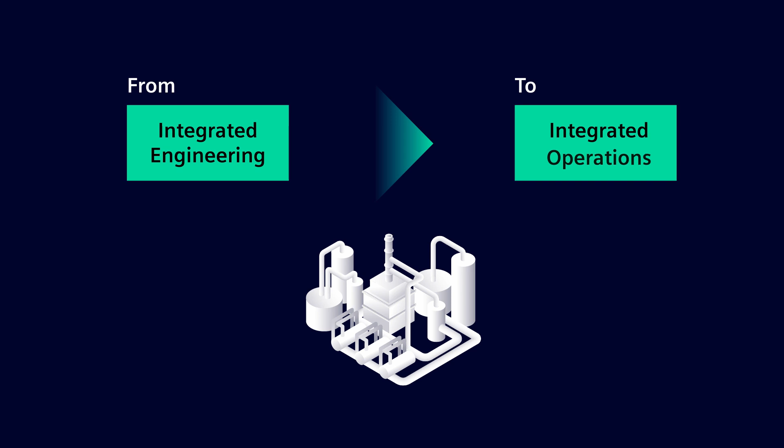Digital transformation is in full swing, and the process industry is no exception. Let's take a look at what opportunities digitizing throughout the life cycle of a plant can offer. From integrated engineering to integrated operations. On the left, you'll see the status of a real plant, and on the right of the screen, the virtual world, i.e. the digital twin.

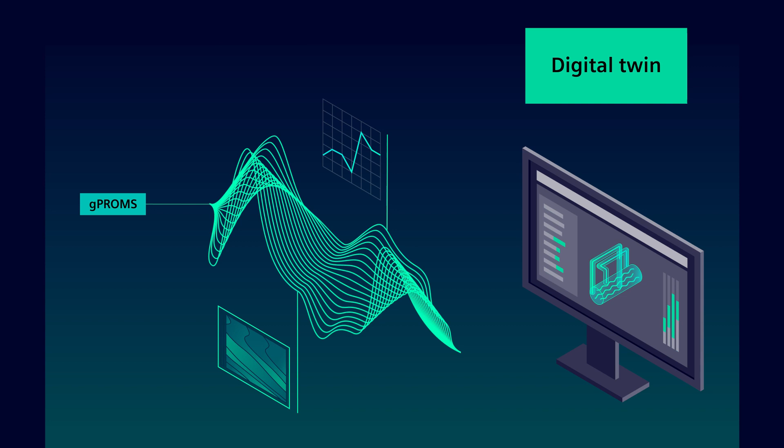Let's start with the design and simulation of the process with gPROMS. This usually prevents time-consuming laboratory tests and pilot plants. With gWAP, the digital application, it is also possible to use the process design as software as a service.

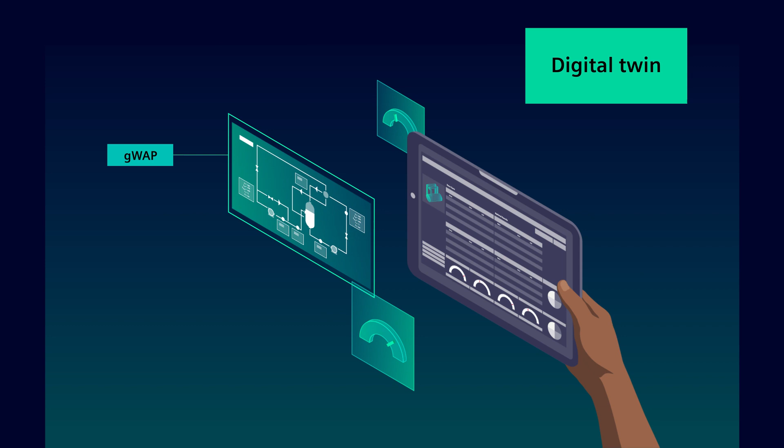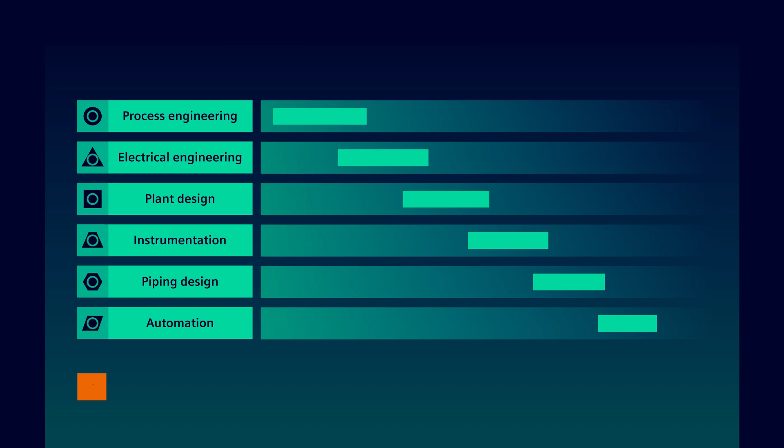Information on the process model can be immediately integrated into the plant design with COMOS as a central engineering and data management platform. All relevant departments can be planned with COMOS as they always have access to the same data pool. This ensures consistent data management. Thanks to the common data management system, some planning steps can be carried out simultaneously. This saves valuable engineering time.

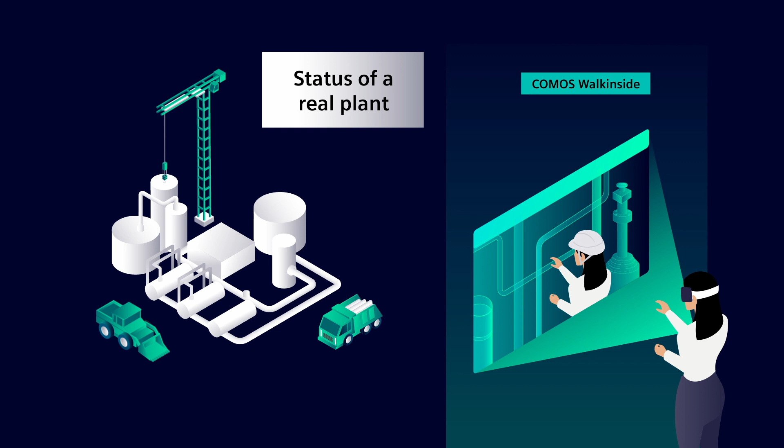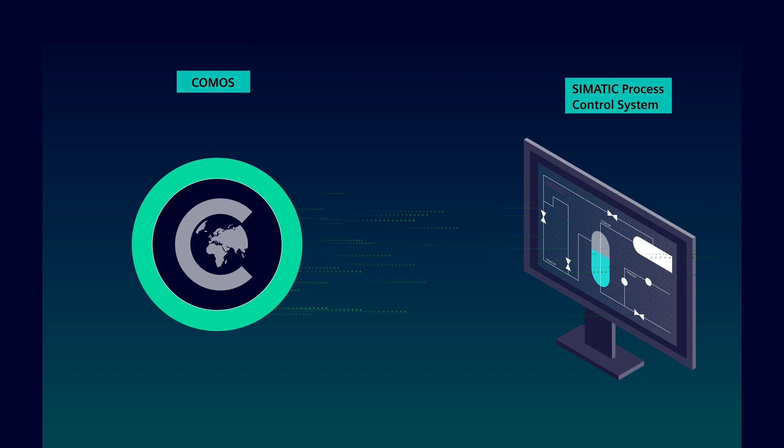Although the real plant is still under construction, COMOS Walkinside can be used to virtually explore the plant. For example, to check and optimize accessibility of critical components for maintenance personnel. Data relevant for automation is then transferred from COMOS to the process control system. This saves time in automation engineering and ensures consistent data.

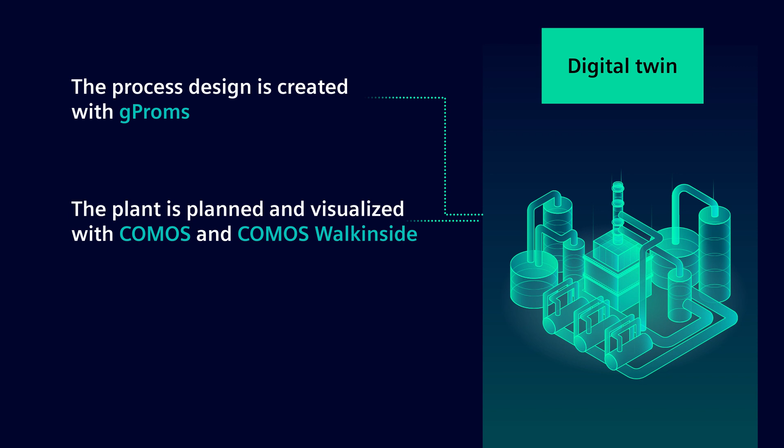This completes the engineering stage, and the digital twin of the plant is automatically created in the process. The process design is created with gPROMS. The plant is planned and visualized with COMOS and COMOS Walkinside. Automation is carried out with SIMATIC Process Control System.

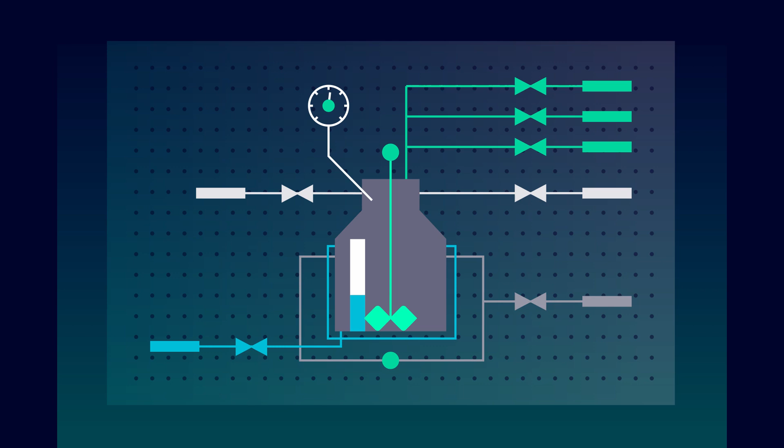The real plant is still under construction, and it is precisely this time that can be used to optimally prepare for commissioning. SIMIT enables prior virtual commissioning with the help of a virtual controller. Various events can be simulated and the process control checked. Errors can therefore be detected at an early stage and rectified before the plant is commissioned.

SIMIT's operator training system enables early training of operating personnel. In addition, service personnel can also be prepared for their work at an early stage. With COMOS Walkinside, it is possible to define various scenarios, such as behavior in an emergency, and to practice them in a virtual setting. This means that staff are immediately ready for action when the plant is completed.

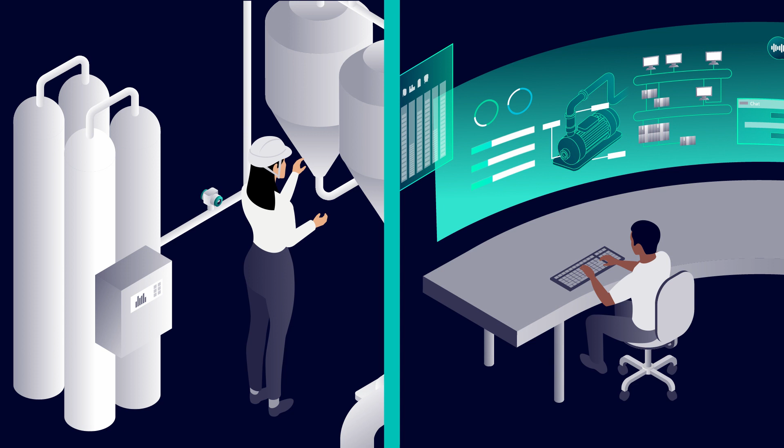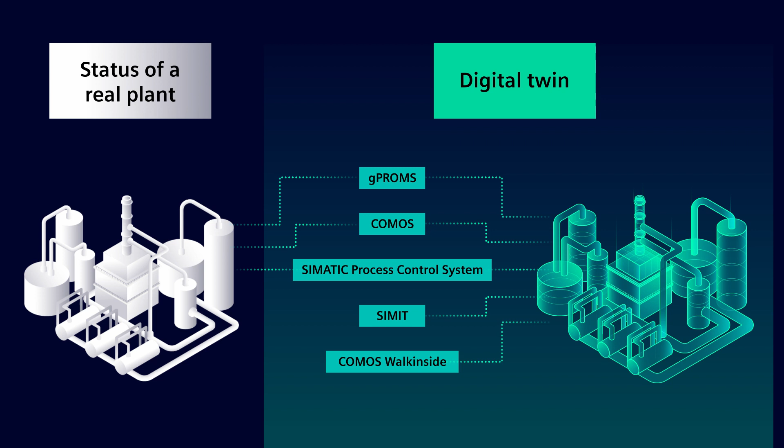If the real plant is partially equipped with other components than originally planned, a simulation can be carried out again with gPROMS to verify and optimize process engineering. Thanks to previous virtual commissioning and simulation, commissioning of the real plant can now be carried out much faster and more reliably with a tested program. With integrated engineering, the plant can now go into productive operation earlier.

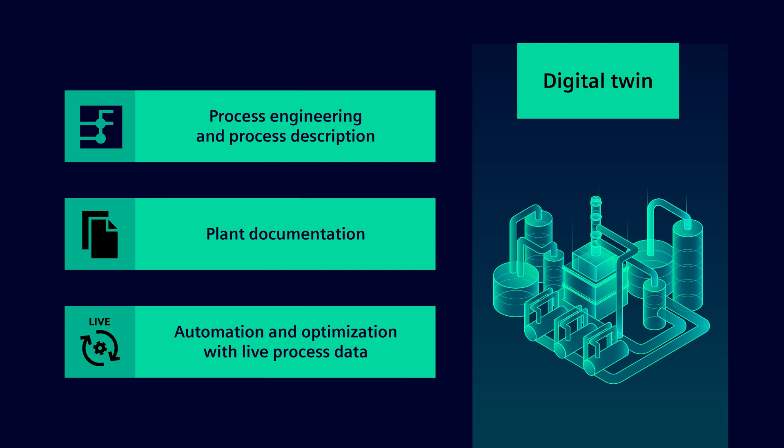In addition, a comprehensive digital twin of the plant is created with process engineering and process description, plant documentation, automation and optimization with live process data. Take advantage of the potential of digitization with integrated engineering. Learn more about the many possibilities and advantages that digital twins offer in plant operation in the second part of the video series, Integrated Operations.